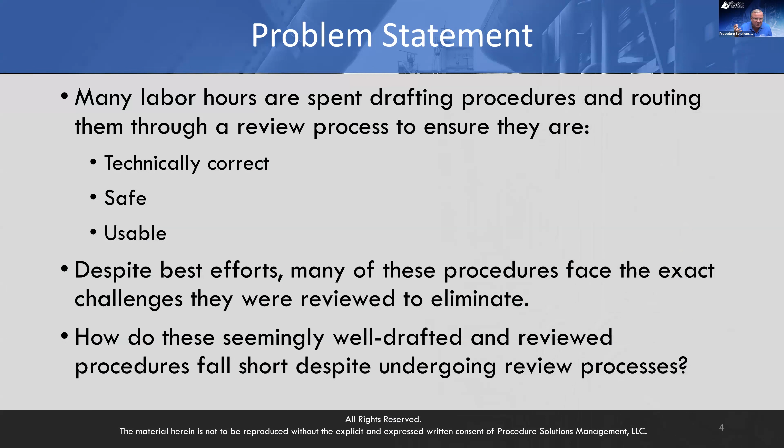Here it is. So here's a problem statement. Many labor hours are spent drafting procedures and routing them through a review process to ensure they are technically correct, safe, and usable. Those are the key points, right? Despite best efforts, many of these procedures face the exact challenges they were reviewed to eliminate. Now, how do these seemingly well-drafted and reviewed procedures fall short despite going through some type of review process? How is this happening?

So let's make sure that when we're all talking about procedures, because this is a very global audience, there's a lot of different names for things, but here's the pure definition of procedure as we discuss it for this lunch and learn, taken from the Procedure Professionals Association and their writer's manual, which is the standard used in many different industries for what does good look like. This document is being used in numerous different industries today.

It originated over 20 years ago in the commercial nuclear power industry, and it has just blown up in different industries. I would say 90% of the work that we have today is in the petrochem and refining areas, using the standards that we're going to talk about today. Okay, so definition, procedure. It's a controlled document designed to improve human performance, by clearly providing the purpose, the specific intent, and a sequenced direction for an activity, program, or process.

Now, breaking it down a little bit further, normally procedures will fall in one of two categories. They're either technical in focus or administrative in focus, right? A technical procedure is a document that outlines a series of steps for the operation, maintenance, or testing of a system, structure, or component, right?

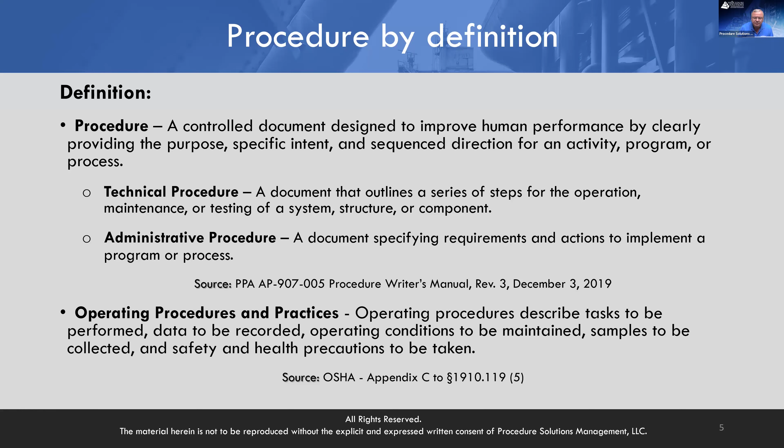Now, something that came across the internet I thought was kind of interesting. And this came from process safety management, which is like the quality assurance plan area for the petrochem refining industries, right? As compared to in the commercial nuclear, you have NQA-1, which is the Nuclear Quality Assurance Standard, right? Which is the foundation for the quality programs for all the commercial nukes and SMRs and everything else across the world, right?

So here, I saw this on the internet, I thought was interesting. Unlike the intent of typical documents or guidelines, procedures should always be considered a tool designed to support and improve human performance. They further went and said, treating procedures as if they were equipment, like a pump, valve, or reactor, which they're talking about chemical reactions, right? Or safety systems, is fundamental for building a successful process safety management system. And I recognize some of you don't fall under process safety. If you guys don't fall under process safety, then what do you fall under, right?

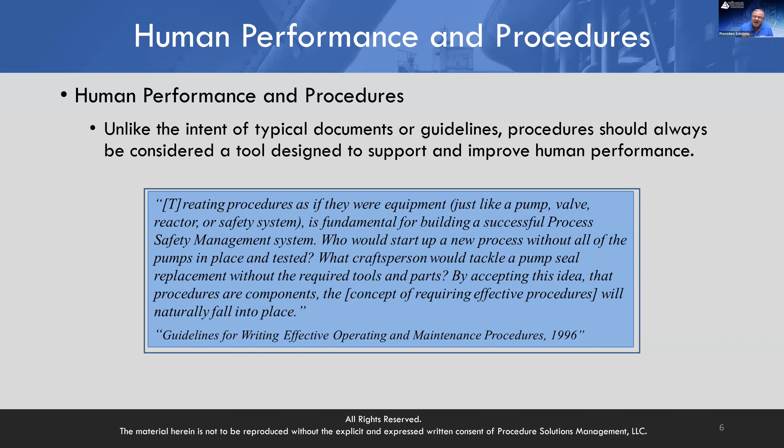So they further said, who would start up a new process, which is a new system or a new process of maybe a new batch of things that you're creating, without all the pumps in place and tested? What craftsperson would tackle a pump seal replacement without the required tools and parts? By accepting this idea that procedures are components, the concept of requiring effective procedures will naturally fall in place. And this came from 1996.

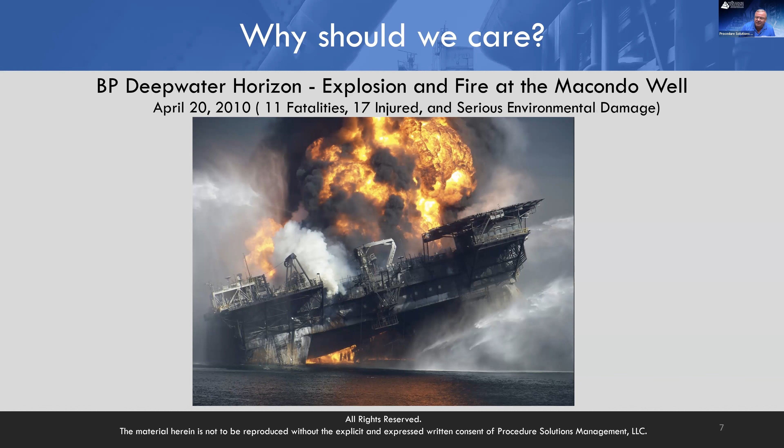Additionally, and some of you attended my classes, this is like one of my favorite things in the world here, was the horrible accident that occurred in the Gulf of Mexico in 2010 from the BP Deepwater Horizon explosion and fire at the Macondo well. Now, the Chemical Safety Board, which is csb.gov, conducted the investigation of that accident, which was one of the largest environmental disasters in U.S. history. I think as of January of 2023, the total bill's up over $41 billion in damages and counting.

Okay. Now, there was about a 500-page report that the Chemical Safety Board did on this accident. And what I did was I searched for the word procedure, instructions, and things of that nature. And there's a couple things that I cut and pasted out of this document that I thought were really interesting that apply to what we're kind of talking about today.

First off, they had some significant equipment failures, right? Now, they have multiple safety barriers in place for this equipment, just like the commercial nukes do, where they have multiple trains of safety equipment. As such, they have multiple safety barriers put in place. And when you look at those safety barriers, they made a comment in the investigation report as follows.

There was a blowout of this well, obviously, and while multiple safety barriers had been intended, all were penetrated by complex, multiple failures caused in total by unrecognized technical issues, procedural weakness, and human errors, which is the core of what we're here to talk about today. Okay? Now, additionally, a little bit later in the report, there was another paragraph that said, while not directly related to this failure of this safety device, which they called a blowout preventer, they were doing some testing at the time that this thing failed, all right?

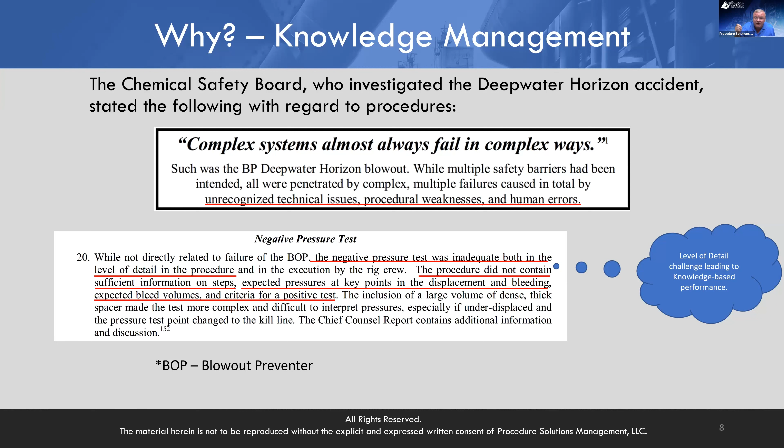Now, I stepped back and I said, all right, well, this is exactly why we're here with Lunch and Learn today. How does this happen? How? Right? I guess maybe if we all had that magic wand and we could wave it and we all knew how, we wouldn't be here, right? But yet it happens. So then they went on further, and I thought this was the key paragraph that really grabbed my attention.

BP, after the accident, hired their own expert, right? God knows how much they paid that person to be an expert, okay? And then the expert commented that when they reviewed the procedures and everything, despite the thing that you just saw on the previous slide, they said, look, the rig crew does not have to be told how to really do their jobs. This should be a routine operation that fits in with their training.

Now, one of the core principles of human factors is that people make mistakes. So I have no idea what the hell this guy thinks he is as an expert. I have no idea, right? To basically classify yourself as an expert and not understand that one critical aspect, that statement is completely beyond belief and missing the primary point that people make mistakes.

The Chemical Safety Board says in the very next sentence, and I think this is key, that this sentiment does not address the fact that procedures are more than a set of instructions. They are tools for competent people. I cannot begin to tell you how often in the last 15 years I have talked to some of my clients and they said, Steve, we think this is too much detail. Or this step that says stop the pump before the level gets too high. That detail is more than enough.

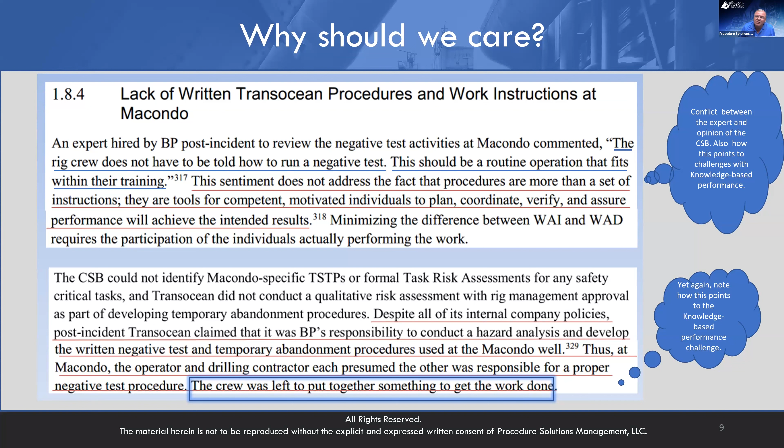The paragraph down below it is another one of those testimonies that says, hey, there was arguing back and forth between Transocean, who owned that rig, and BP about who owned this really bad procedure. Who owns this, right? But in the end, who was left to figure the things out? The crew. And that's the people that you saw on the first slide there, the ones that passed away in that accident, right?

So I went back through, I can't tell you how many assessments I've done in the last 15 years. And I'm not trying to embellish this. I'm not trying to make a big name for Procedure Solutions. We're not trying to do that at all. We're trying to have this big discussion with all of you. Maybe some of you will write me back with some answers yourself and help us see this, right? But here are some notes that I've taken from some of the assessments that I've performed over the last 15 years, right?

I have found that in many cases, there is no formalized procedure review process. There's maybe a management of change review process, but when it gets to the procedures, that part of the management of change review process is silent, right? The procedure revision process is often performed entirely what we call knowledge-based.

There's different performance modes that we all use when we perform work. One of them is called knowledge-based. Knowledge-based means that you're using your own knowledge in your head to answer your own questions on how to go do things. The procedure may tell you what to do, but it doesn't tell you how to do it. So you're using your own knowledge.

When you're using your own knowledge, the error rate for that, and you can Google this, is a 1 in 2 to 1 in 10 error rate. That is significant. As compared to using a well-written procedure, the error rate is between 1 in 100 and 1 in 1,000 chance of screwing something up, right? It was noted in my assessments numerous times, well, Steve, this is the way we've always done it, right?

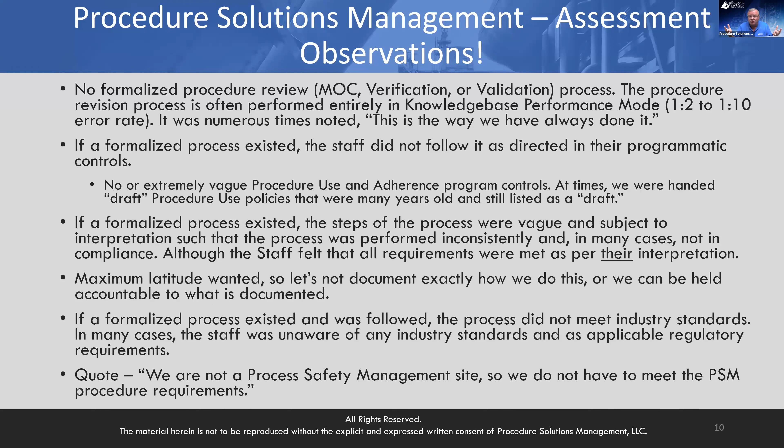Just like in the commercial nuclear power industry, the reason why we have these process controls is for consistency and for quality and making sure that we're safe and we're following all these things, right? And so you got to come up with something, to have these rules laid out so that you're just not winging it. So then look at this next slide.

Validations of procedures are not performed. I've asked people, do you perform any validations? And they looked at me like, what? What's a validation? Well, when you get the drafted document, do you walk it down and verify that the steps are right, in the right order, that you can perform the steps as they're written? Are there any other considerations that should be taken? Like, if you got to do climbing, any special personal protective equipment that you need?

Sometimes the people who write the procedures, although they should be walking the procedure down in the field themselves to confirm all this stuff, again, it's a team effort here.

We all want to go home at the end of the day, and so, do you guys perform any validations? No. Okay. Or what I found is, well, it goes to the MOC process, it gets approved, we use it, and then we find some stuff wrong with it, and then we change it. So I said, so you're actually waiting until you use it the first time? I mean, what about that first time and things blow up? Sometimes that's the last thing you do, right?

And they're like, well, no. Sometimes we use it and then we do it. I said, well, why don't you walk it down and do it before you do that, right? Now you got to approve the document, now you got to rev it right away. Does that make sense? Well, we always got to rev it after we use it. We don't always know what we don't know.

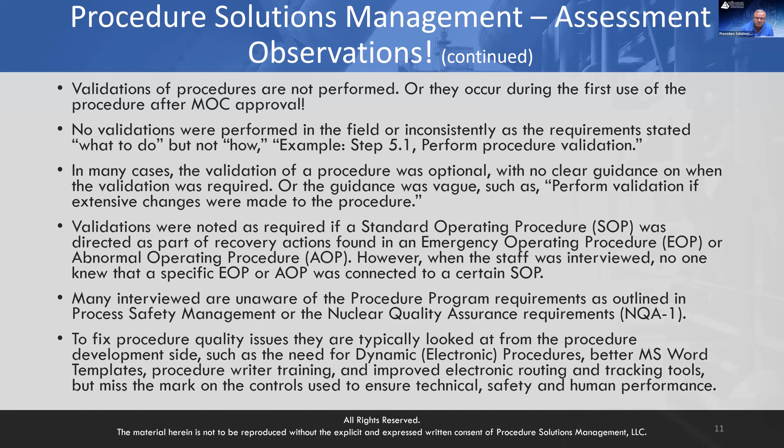As a result of the lack of effective procedure program administrative controls, no training is provided on how to perform technical reviews or validations. Especially think about if you have staff that's changing out. I got some customers that say, Steve, in engineering, we can't keep an engineer more than 2 years before they move off to go somewhere else.

The turnover. I said, well, is there something part of their initial training when they get here that tells them how to perform procedure reviews and what to look at? No, we don't have that, right? So just about the time someone figures out how to do a procedure review, they leave, right?

There are no clear procedure quality standards defining what good looks like. Lots of times no one knows what good looks like. They look at whatever was on the shelf and was approved by somebody else, and they say, well, obviously this was approved by somebody else, and we'll make it look like that, right?

Procedure writers and reviewers are focused on the technical adequacy and safety and have little or no sensitivity to the impacts that occur to the procedure user and task as a result of the lack of usability or human factors emphasis on documents, right? No programmatic controls supporting the development of procedures, or if controls are provided, they have been found to be significantly out of date as compared to the latest industry standards, right?

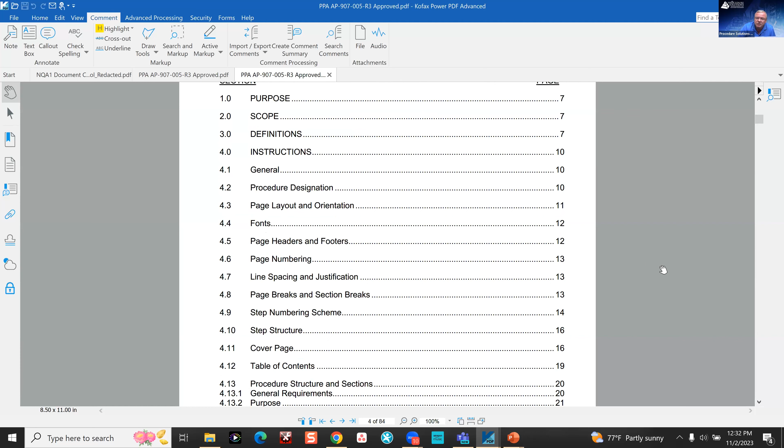I would say that this is very, very popular. The Department of Energy here in the United States uses it too. And you can see this for purchasing, becoming a member, and you get it. You can work with them to get a download for it, right?

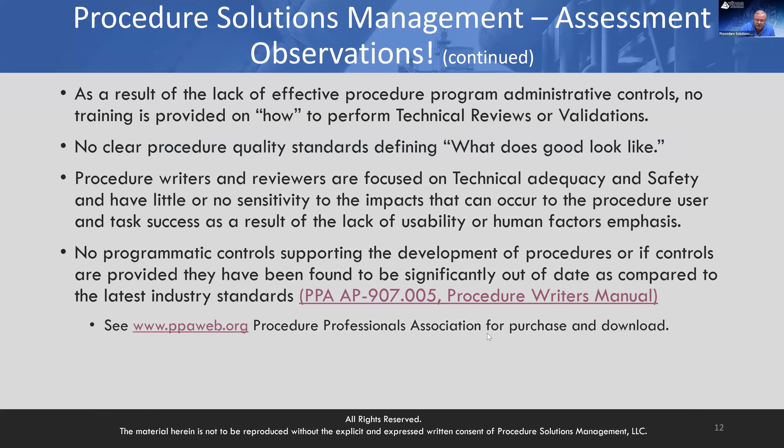All right. Now, on the following slides, let's look at OSHA for a second. I know not all of you are OSHA folks or tied to process safety management, but OSHA states that the process safety management standard applies to any process that involves a chemical with quantities at or above the threshold listed in Appendix A.

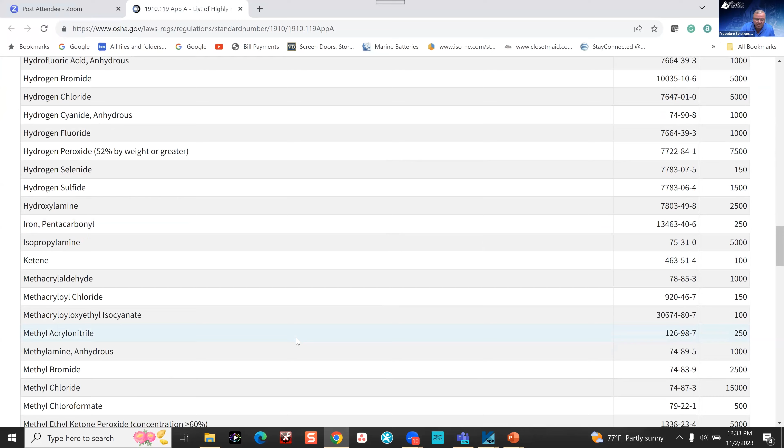You go to Appendix A, and then all of a sudden you come up with this appendix here, and it says, hey, if you got these chemicals in here, and let's scroll through it real quick because we got to watch our time here. All this stuff, if you're playing around with these chemicals, then you are in this box for process safety management, right?

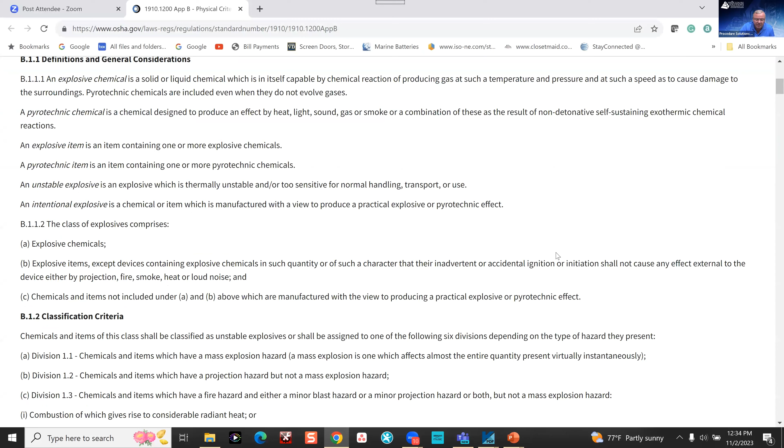And then they have category 1 flammable gas, and so they say if you meet this criteria for this flammable gas, here's category 1. It gives you what the criteria is. And if you meet this, then whatever you're manufacturing, you fall under process safety management, just for some of you guys that are in the utility industry that don't know what this means, right? All right. And so that's just a slide about process safety management.

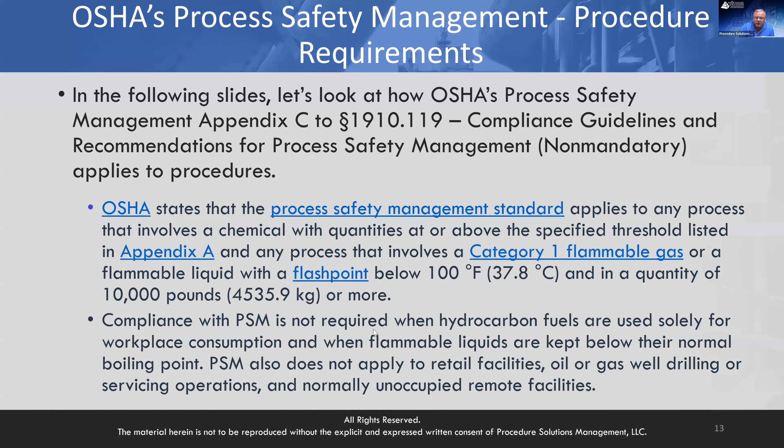So then you come over here and let's look at some of the things that this OSHA requirement says. Now, this is kind of interesting because, again, you'll see very much parallels with the commercial nuclear industry. Matter of fact, I would say they're even more detailed than the commercial nukes are in NQA1. Procedures need to be technically accurate, understandable to employees. Well, what does understandable to employees mean? Human performance. That was a big thing the nukes were missing 20 years ago. We were trying to make sure our procedures were technically correct and safe and missing the human performance piece, right?

And so now there's this big push to make sure that you can read the step and understand it, right? Some people will look at the step and say that step's technically correct. And then you or I would read the step and try to figure out what the hell is this trying to say? What is the step trying to say to us? What am I supposed to do with this? And so we figured out that, hey, that's a problem, right?

So notice that they should be revised periodically and ensure they reflect current operations. Operating procedures should be reviewed by engineering staff and operating personnel. So if you're in an operations area, notice that this is a regulatory requirement. This means that in your process, something should be saying, hey, when this procedure goes out for review, engineering looks at it and also operating personnel, to ensure that they are accurate and provide practical instructions. Well, that gets back to the human performance side on how to carry out the job duties safely, right?

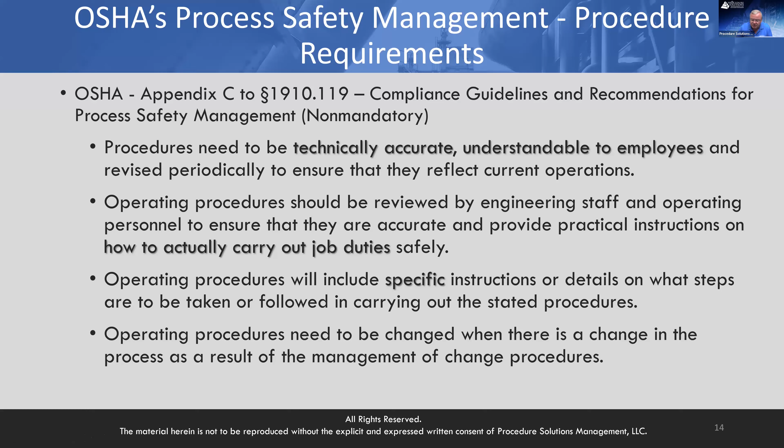Then you look at the next thing. PSM also says the consequences of operating procedures need to be fully evaluated and the information conveyed to the personnel. All management of change actions must be coordinated and integrated with the current operating procedures, and operating personnel must be oriented to the changes in the procedures before the changes are made. So that means you don't make the change and then revise the procedure after the equipment's already running, right?

When the process is shut down in order to make a change, the operating procedures must be updated before the startup of the process. There are videos on the Chemical Safety Board website where they made the change after the process was already up and running. There's an accident where a heat exchanger blew up 12 years after this, right? So anyway.

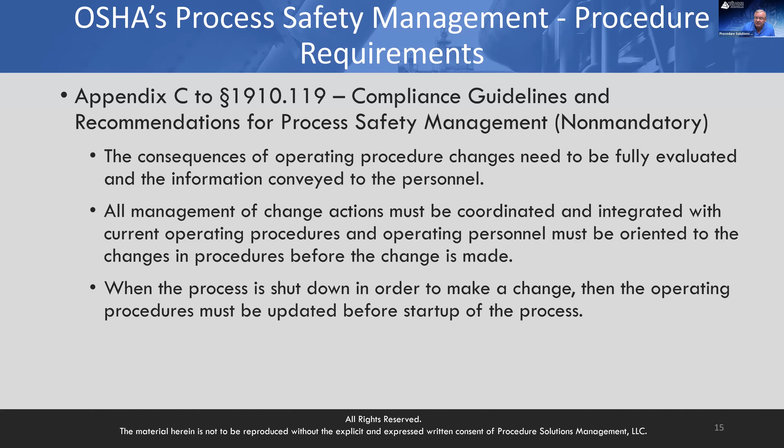Operating instructions for each procedure should include the applicable safety precautions and should contain appropriate information on safety implications. Operating procedures need to address operating parameters containing operating instructions about pressure limits, temperature ranges, flow rates, what to do when an upset condition occurs, what alarms and instruments are pertinent if an upset condition occurs, and other subjects.

Operating instructions must clearly indicate the distinctions between startup and normal operating, such as the appropriate allowances for heating up a unit to reach the normal operating parameters. Operating instructions need to describe the proper method for increasing the temperature of the unit until the normal operating temperature.

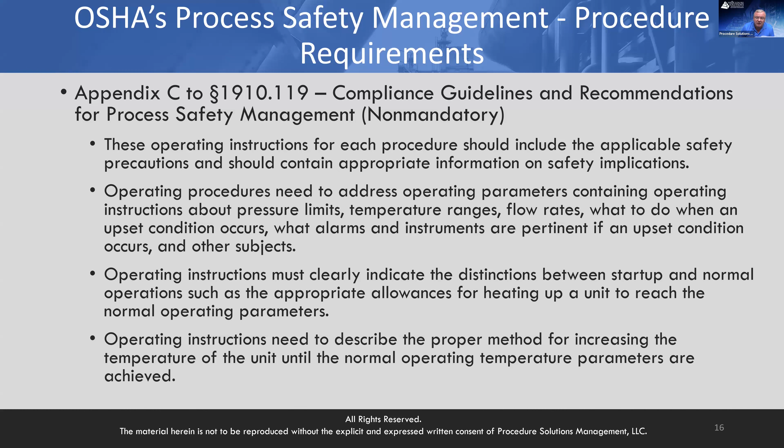Realize that this is criteria that your reviewers, as technical reviewers or validations, should be informed of. Notice that these are all the process safety management requirements that they assume you guys are doing, that we find routinely is not happening, right? Now,

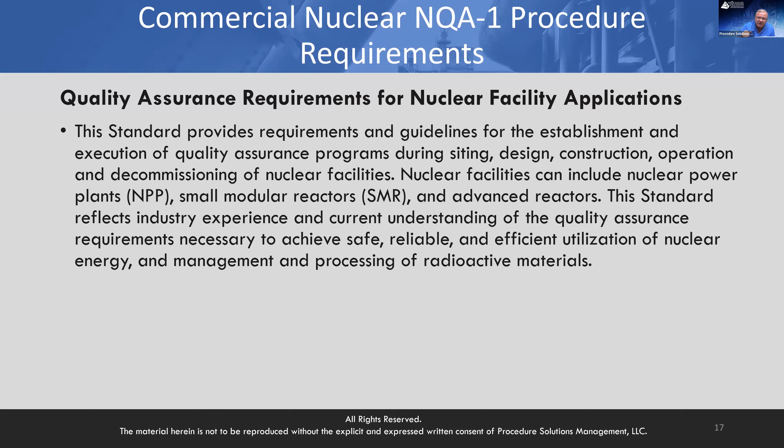let's shift gears now. Let's look at the commercial nuclear side, right? Quality assurance requirements for nuclear facilities. A standard was provided that says it provides requirements and guidelines for establishment and execution of quality assurance programs during the siting, design, construction, operation, decommissioning of nuclear power plants, small modular reactors, advanced reactors. So this NQA-1 Nuclear Quality Assurance Standard applies to all these things. So let's look at some of the things it says.

Now, in that standard, there's an Appendix B that talks about procedures. Matter of fact, it is right here. I took this from a utility that I've done work with, so that's why it's kind of redacted in some places. Notice how it says, in summary, procedures are sufficiently detailed for a qualified individual to perform the required function without direct supervision.

If you attended any of my classes, we said, what's the level of detail that we need to have? We need to make sure that the level of detail is for a qualified, although inexperienced person with no contact with your supervisor. Well, guess where that requirement came from? Procedures are sufficiently detailed for qualified individuals, right? Notice in here, without direct supervision, so you see the parallels.

This whole paragraph is talking about procedure use adherence. So for some of you that have procedure use adherence documents that don't comply with it, everybody says, oh, that's the INPO requirement for procedure use adherence. It's in NQA-1. It's part of your quality assurance standard. Look, it says right here, guidance is established to identify the manner in which procedures are implemented, including identification of the steps that require the procedure to be present and followed step by step while the task is being performed, or the user to have committed the procedure steps to memory.

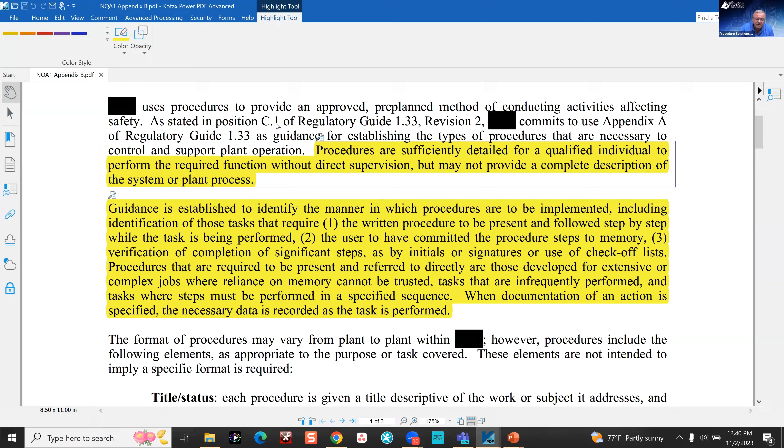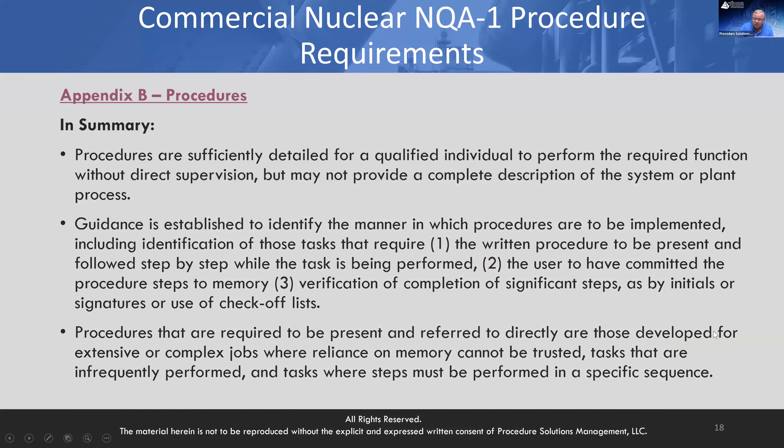So notice all this stuff is part of NQA-1. Where do you think INPO got it when they created it in 2011, or actually 2009? The stuff that you find in the documents of the Institute of Nuclear Power Operations came from NQA-1. So in summary, I have these slides. Procedures are sufficiently detailed. Guidance is established to identify the manner in which procedures are implemented, and procedures that are required to be present and referred to directly are developed for extensive jobs and so on.

Then you look at the next piece of it. There's a document control piece, which gets to the main focus of this lunch and learn, the review process. So here's what that document control looks like, all the things that came from NQA-1, and I have it all highlighted here. In summary, procedures governing generating site activities, see Appendix B, are reviewed by qualified people other than the originator or preparer.

Now, at your site, do you define who is a qualified person other than the person who developed the change? Such procedure review includes the determination whether additional cross-disciplinary reviews are required. Provisions include levels of use, such as requiring the document to be present at the work location. Revisions to controlled documents are reviewed for adequacy and approved for release by the same organization as originally did so, or by other designated organizations that are qualified and sufficiently knowledgeable of requirements and intent of the original. This sometimes is talking about when you farm things out to Westinghouse or different engineering firms.

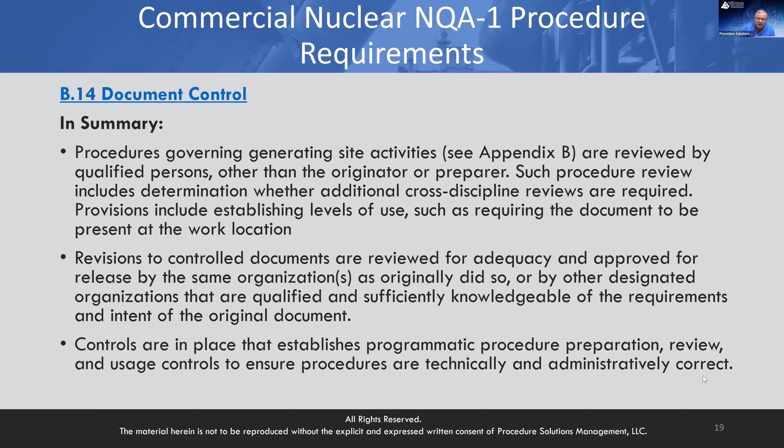Controls are in place that establish the programmatic procedure preparation, review, and usage controls to ensure procedures are technically and administratively correct. But what's the issue here? Notice in both of these regulatory areas, the requirements communicate what is required, but do they communicate how to ensure these programmatic controls accomplish these requirements? Is it okay that the whole process is done inside your head? No. Obviously, it is purposely vague so as not to dictate to the company how to perform this work. But in the end, the regulator does expect the programmatic controls put in place to accomplish the intent of what was on these prior slides. So here lies the problem.

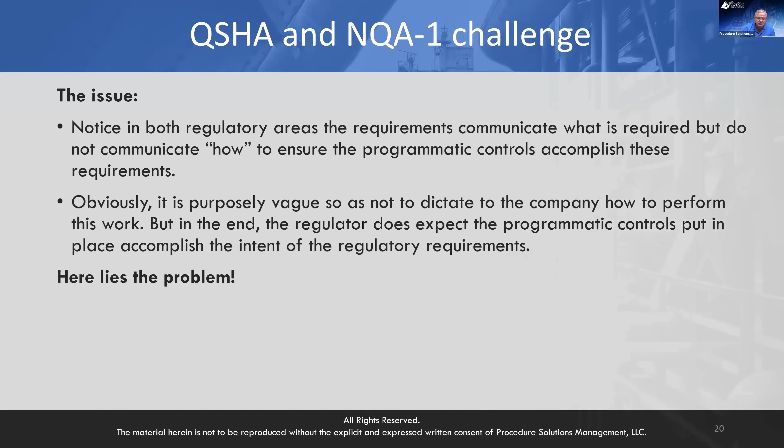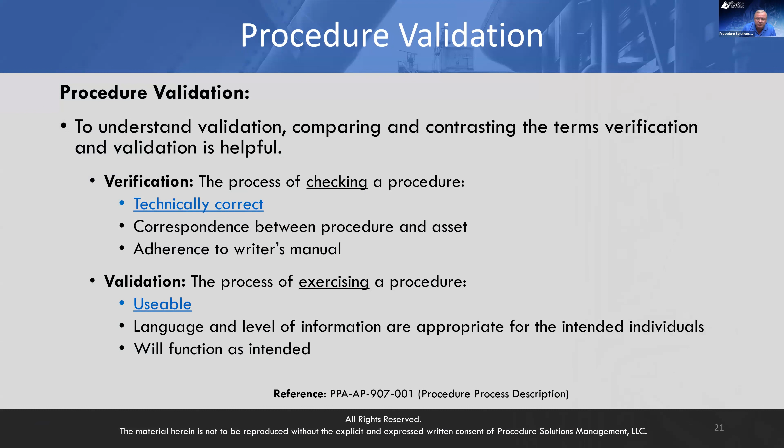Procedure validation, right? So remember I said, what is a procedure validation? To understand validation, comparing and contrasting the terms verification and validation can be really helpful. Verification is the process of checking a procedure to make sure it's technically correct. Well, how do you do that? I mean, that seems to be kind of vague.

Oh, it's not coming up.

All right. So what I was going to click on was a checklist. Many times we come to grips and say, hey, for consistency, to ensure that we're getting the technical reviews performed consistently at a high quality level, we'll create a checklist of common questions that technical reviewers should be able to answer. And if they don't feel they're qualified to answer all those questions, then they hand it to someone who is qualified to answer those specific questions on that technical review checklist, right?

Many places I go, there's no checklist. Technical review is based on however you feel that day. Not to take away the knowledge, abilities and experience they have, but some of us have 30, 40 years of experience, so you can expect a pretty thorough technical review from our experience. You've got some people fresh right out of college doing technical reviews. Not to take anything away from their college education, but when they have no experience with all this equipment and work, it's hard for me to say they're thinking of all the things they should be thinking of to say this technical review is good, right?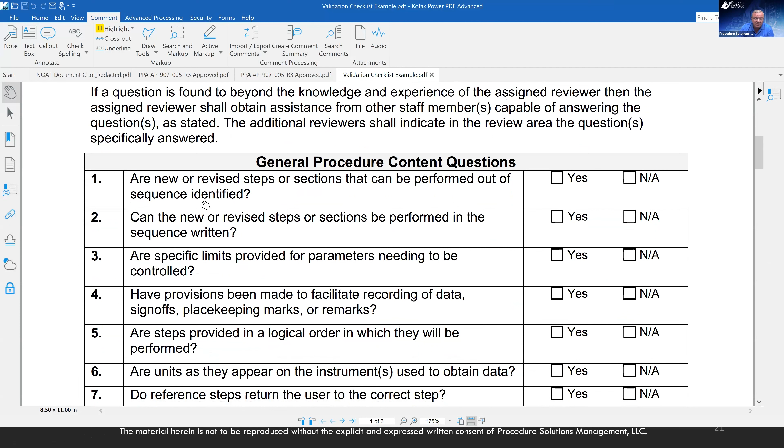Validation. It's the process of exercising the procedure. So here's an example of a validation checklist. Can new or revised steps be performed out of sequence? Can the new or revised steps be performed in the sequence written? Are there specific limits provided? Are there places to record the data they're asking for? Are the steps provided in a logical order? Are the units as they appear on the instrument you have to get the data from?

Do steps return you to the correct step? Is there sufficient detail? Are trip sensitive steps clearly identified? Is it specified how and to whom required communications occur? Are the component physical locations accurate? Are the words and symbols used specific and familiar? You know what I mean?

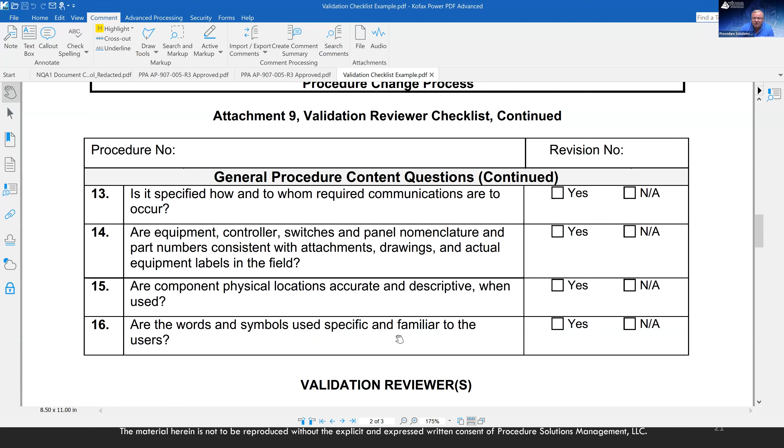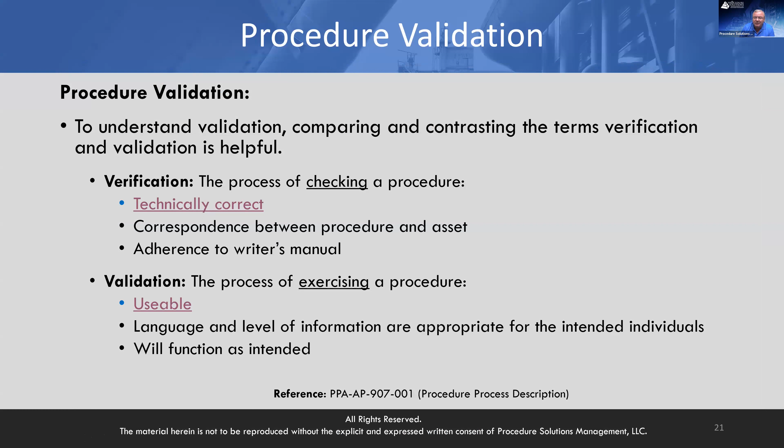So what I'm trying to get at is that you can have multiple people write their comments in here. You can have multiple people do a validation, right? But that should be done by some checklist, to make sure that you have some expected quality level of what a validation should be versus being so subjective, right? Now, then you get in here and you look at it. So what is a validation?

Well, a user or a team of users can perform a validation, and they should be performing it on all new procedures. Now, this is kind of vague: extensive changes to the technical procedures. Sometimes we'll say if the intent of the procedure has changed, the scope of the procedure has changed, or more than 51% of the procedure has changed. So there's some criteria to help clarify what they mean by extensive changes, right?

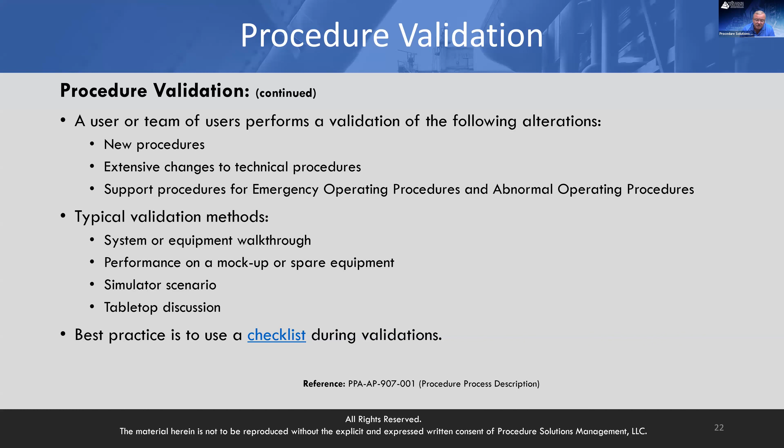Anything that supports the procedures for an emergency operating procedure or abnormal operating procedure. You think someone just dreamt that up in the nukes? No, that's because we didn't do that at some point in time and we screwed it up. So there you go, right? Typical validation methods include system or equipment walkthroughs, performance on a mock-up or spare equipment, simulator scenarios, and tabletop discussions. Best practice is to use a checklist, right?

As noted on the previous slide, a controlled procedure change process can create the standardization and controls necessary to greatly eliminate technical safety and human performance error. As noted by the Chemical Safety Board in its investigation of BP Deepwater Horizon, procedures are more than just a set of instructions, right? They're there to make sure that you achieve the intended results, because if you rely on people alone, they will let you down.

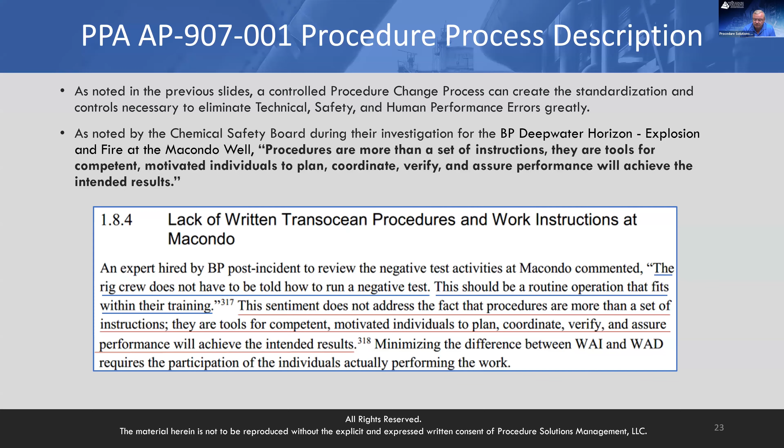Right? So the PPA, the Procedure Professionals Association, developed a standard over 20 years ago called PPA AP-907-001. It's called the Procedure Process Description. This document can be obtained through the Procedure Professionals Association, and I highly recommend it. Now, I don't care how big or how small of a company you are, we have written these things for multiple different industries. Some people only had 17 people that controlled the whole plant, as compared to 1,000 or 2,000 people, right?

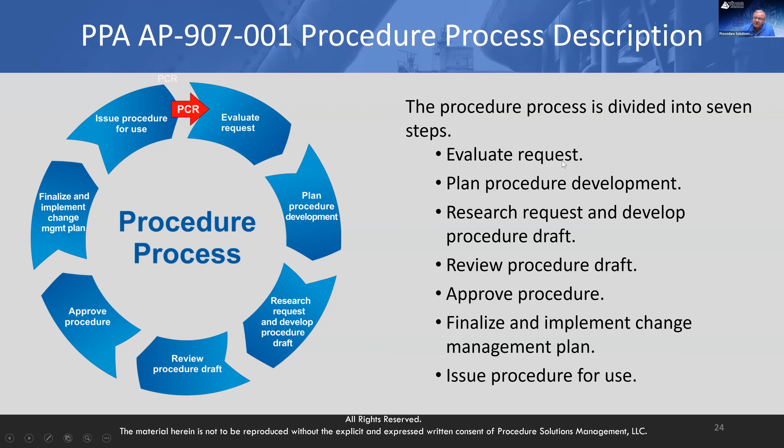So what I'm trying to say is the one thing in common is that when you change procedures, there's 7 steps to do it. Sometimes those 7 steps can be written as simply as 5 or 10 pages of here it is, do this, compared to a commercial nuke where it's probably 130 to 140 pages long, right? Now, the process is divided into 7 steps. As you can see, here are the 7 steps. As a matter of fact, let's get to the 7 steps. So here's step 1. Now, I'm giving you the high level.

In this document, it breaks out, defines and clarifies each one of these sub-steps, what they are and what they should consist of, which you can use to perform a gap analysis of your process against what the standard says you should consider. We use this for all our evaluations to say this sets the standard. And I will tell you that when we have found major procedure quality issues, one or multiple of these steps is missed. And so then it helps us say, hey, look, here's the steps that you need to add to your process to help you get better and avoid this problem in the future, right?

First off, everyone at that work site should have the ability to submit some type of document that says this procedure is broke, this procedure needs to be changed, this procedure needs to be enhanced, but everyone should have access to something where they can do that. I've gone to some plants, and you know what that process is? A sticky tab that's placed on someone's desk. That is not a process. That is an accident waiting to happen, right?

That change request then gets an initial screening, sometimes by an immediate supervisor or whoever owns the document, so they can look at it and say, you know, this procedure is not wrong. I think you read that wrong, but it is indicative that the wording of this is not clear, because somehow you read it to think this when this is really technically this. So we do need to fix the wording on it, or maybe there's a step missing or whatever else, right?

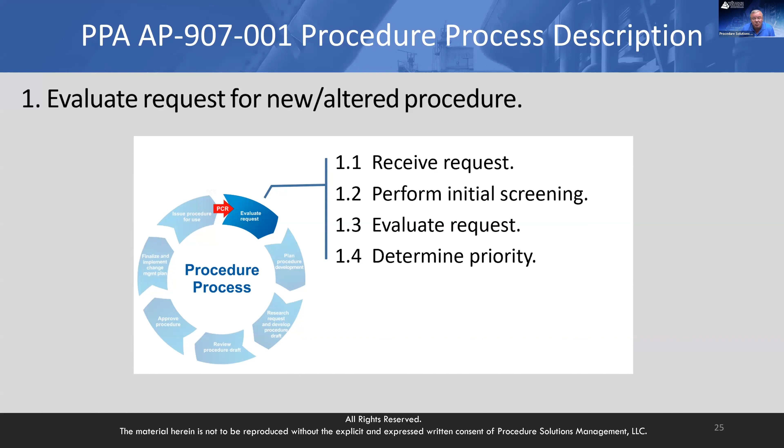And so there's initial screening done, and then that request is evaluated further, and then there's a priority given to it, right? Is it broke? We need to fix it now and turn it around. Is it something that we need to do before the next shift occurs? Is it something that's just an enhancement? Is it just an editorial change? So we want to look at the priority of things, because we never have enough resources to do all the work. If you have a fairly strong culture, then you're going to get a lot of change requests. If you don't have any change requests, there's something wrong.

Step 2, all right. That change request now is evaluated, normally by whoever owns it. Every document should have an owner. Sometimes there's a backlog of things. Maybe if you're the manager of operations, you know that you have multiple different procedures that have had requests to be improved, and they're all sitting there waiting for someone to have availability to do it.

And so what we're going to do is evaluate that, set priority on things, and then determine how much of a review through our review process this needs. Is the change to this procedure limited to just a couple steps, one section? Does the whole document have to be reviewed? Well, that can change how thorough the reviews need to be, based on the volume of work that needs to be applied to do it and do it right.

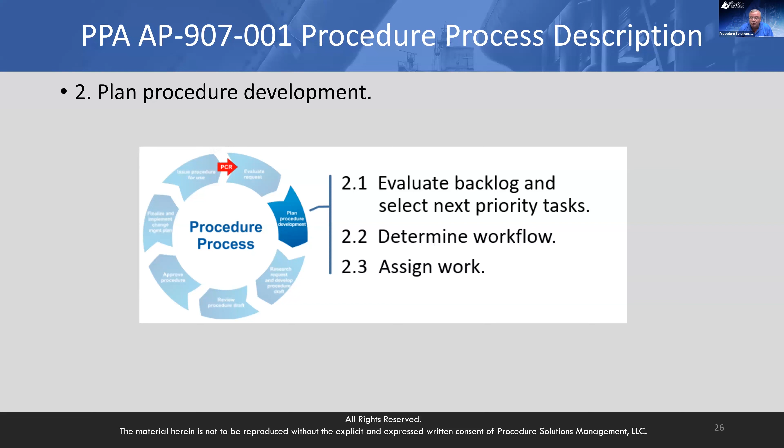And then someone that gets assigned this work, someone I hope has been trained on how to do this work, right? That person, and again, this isn't a sales pitch, but we teach the PPA certification classes. This is where we teach this stuff.

We teach people how to understand what the scope is, look at operating experience, evaluate outstanding issues, look at the references and commitments, how to determine how much technical content they should do, evaluate human performance challenges, how to develop a draft, and then make sure that draft gets handed to whoever asked for it in the first place, and make sure that they look at it and say, yeah, this is what I asked for.

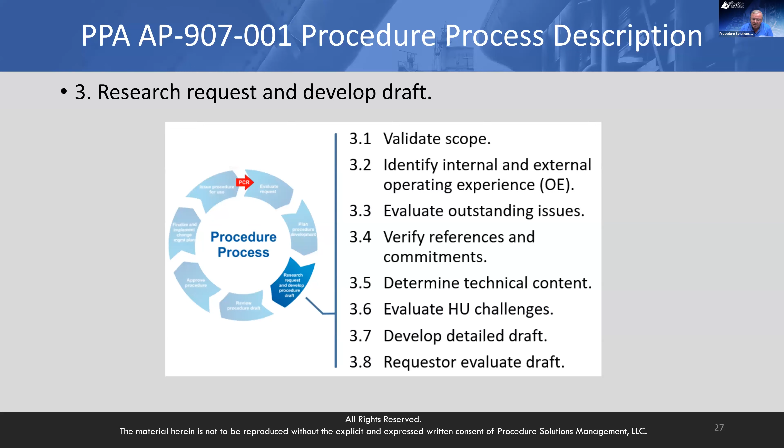That's great. Or they look at it and say, I have no idea what the heck you just did because this is not what I was looking for. So we want to make sure all that gets clarified, right? Then step 3 gets done. You move the step, and you got to have a questioning attitude. So I threw these slides in here. You got to have a great questioning attitude.

No matter what you do, you got to make sure you separate your facts from assumptions, validate your assumptions, be aware of the critical aspects of what you're working on. Do not assume that every approved source is applicable and infallible. I've yet to find a perfect piece of engineering. I've seen more procedure writers and planners find stuff that's broken with some engineering document that's been through a complete review process, and someone just has that one nugget of, well, what about this? And they're like, oh, we didn't think of that, you know?

So don't assume that the vendor manual, the tech manual that was written in China and then converted to English, is always right. If you see something that's like, well, this makes no sense to me, but yet when I look at it, this procedure now is at Rev 7. This change happened at Rev 3. This means this step's been there for 4 or 5 years. Oh, I must be missing something. So it has to be okay.

There's Chemical Safety Board stuff that shows where stuff blew up after sitting there for 12 years, right? Do not follow procedures without critical thinking. People cannot be robots. There's a reason why procedures are revised, right? And do not be so arrogant. Like, I was a licensed reactor operator, senior control room operator.

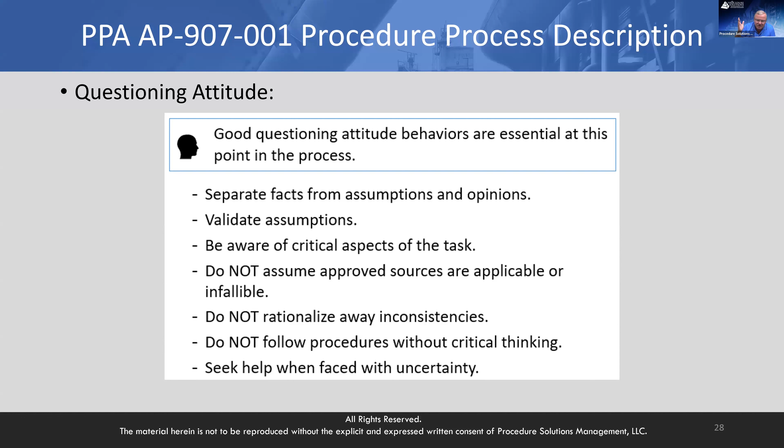I was licensed. And I would tell you sometimes we think we know everything. We're the people licensed to run the plants. This is what we do. We've been trained for a couple of years before we ever started our jobs, right? And now, do not be so arrogant to not say, we ought to ask the system engineer or the design engineer about this, because this makes no sense, right?

Additionally, in the classes that we teach, we talk about all these human performance error likely situations. There's 18 of them. Right now, as I said, we have almost 4,000 documents in the queue to be worked. I just hired 12 people, right, to handle all the work that we have. And we're looking at these human performance challenges, and they're all over the place. Many times people had no idea that these things were human performance challenges, right?

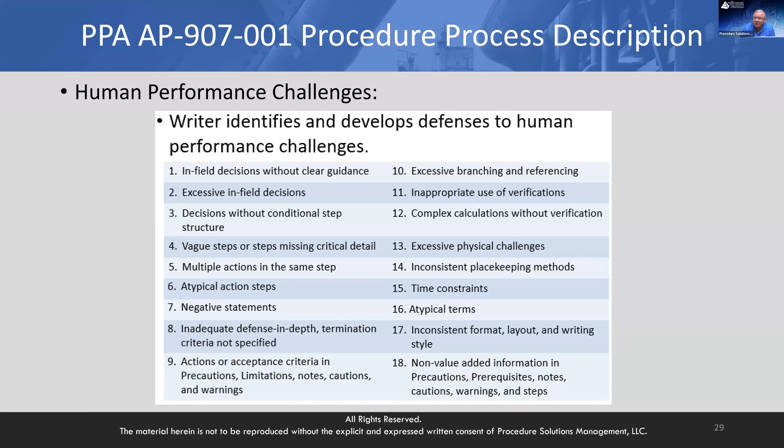Then you go to step 4 and it says, all right, now you need to determine the appropriate reviews, right? Who's the reviewers? Make sure you get the right people. Who's the best people? Have you got some change to a diesel generator procedure and you know you have someone at your location that is the subject matter expert? Get them to be the reviewer, not someone that occasionally works on this thing and they're a general mechanic, right?

Perform the reviews. Make sure you have some process that when people provide their comments back, you don't lose any of them, that you have some way of making sure, like a special folder. Maybe it's a folder inside your desk, the old school way, and you print it out and you put it in a folder. Make sure that you don't lose it, right? And then make sure the procedure is validated, right?

Validated. Oh, critical step. Just had a customer that's using dynamic electronic procedures have a major equipment failure, because there was a branching step in a procedure that now in dynamic electronic procedures is not necessarily always an if-then, when-then type set.

It's like, say, do you meet this? Yes or no? Well, if it's yes, then the procedure automatically takes you to the next step versus you having to do that manually like we've done on paper for years, right? It took them to the wrong step.

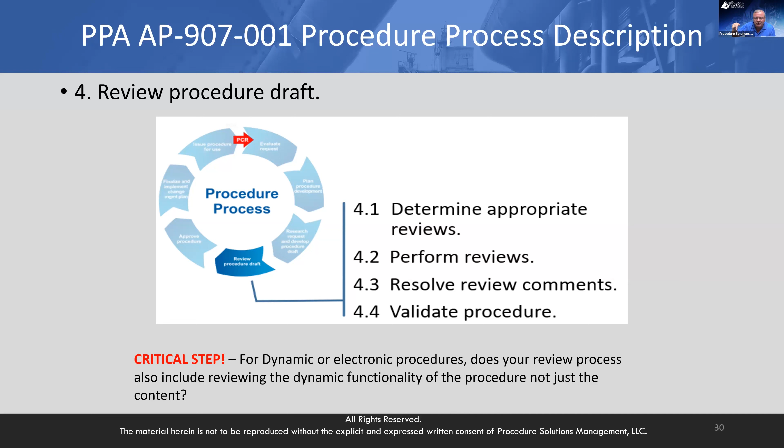They were basically printing out a hard copy of the document, sending that to the review cycle. No one was looking at it. They were just relying on the procedure writer to make sure that they have the right link go to the right place. It's not a good thing to do.

Make sure now that the procedure's been reviewed, make sure it's ready for approval, make sure that maybe if there's an on-site safety review that needs to be done for safety, obtain that, and then it's approved. So now the document's approved, right? Maybe whoever owns it signs it and says approved.

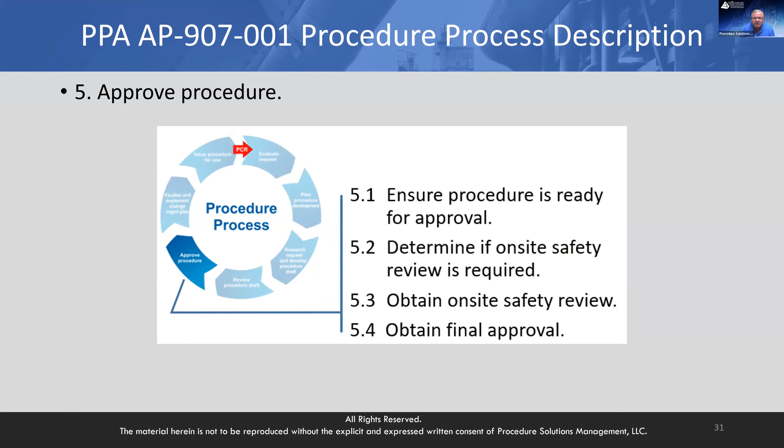But now we need to think about what training needs to be done. Is there any change management that needs to be done? Communication, coordination, do we need a change management plan for this? Many cases, this is a no, never mind. In some cases, when you get administrative process documents, it's huge.

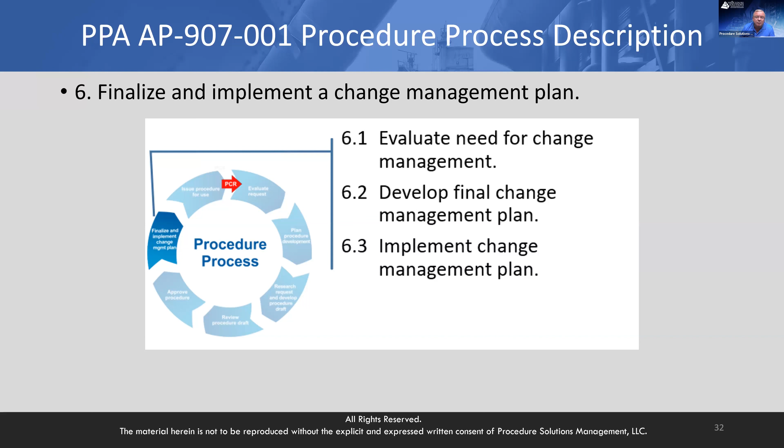I rewrote a safety document for a large utility out in California, 26,000 employees, and it impacted everybody, right? It took me literally probably 6 to 8 weeks to write the document, and it probably took almost a year to manage all the change management with it, right?

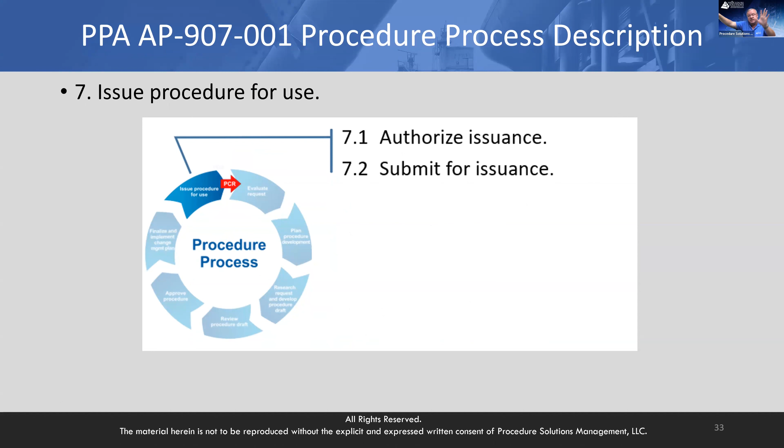And then lastly, once all the change management stuff is done, whoever is the ultimate authority that says, yes, I approve this document, signs it, and it gets sent out. And now you're with document control and trying to figure out what to do with it, right? So why should we care about all this?

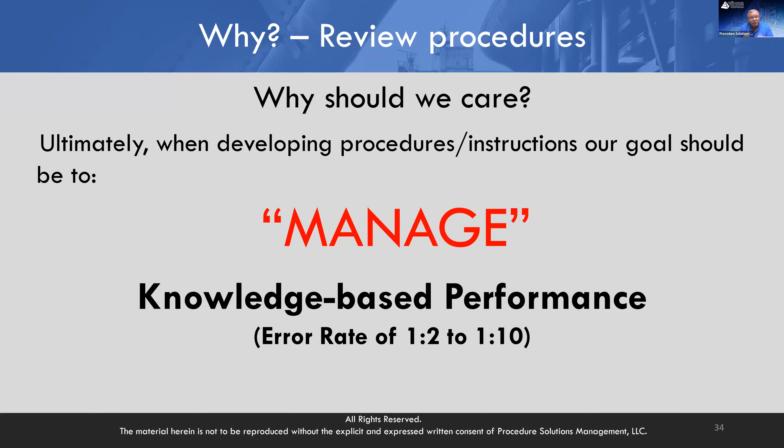Ultimately, when developing procedures, our goal is to manage knowledge-based performance. And the only way you're going to manage it is make sure that the review process is thorough, that all the I's are dotted, the T's are crossed, that you've considered all the potential failure mechanisms so that the person who performs it can be safe and successful, right?